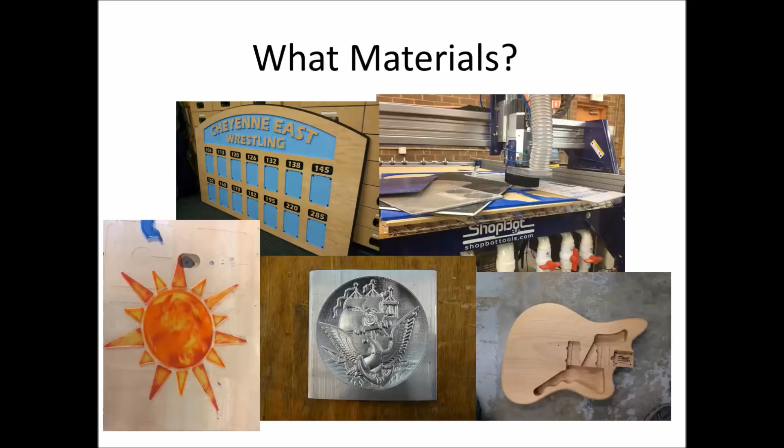For this training, I'm going to reference the router bit starter kit that we sell. You can see it on our website, on our online store, or a lot of you, when you've purchased a machine, have bought this kit. It's 8 different bits that come with the purchase of your machine, and these are just a good selection of bits to get you started. And these bits can be used on a broad range of materials. It's how you program the feeds and speeds for them to cut.

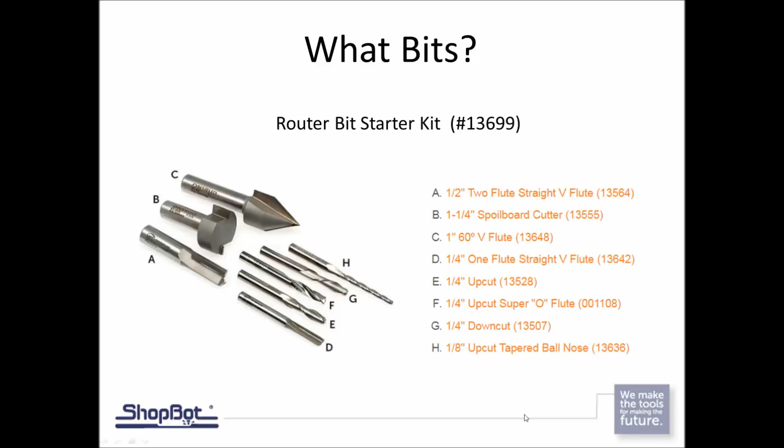So with that also being said, there are hundreds of different bit manufacturers out there, and there's hundreds of different styles and types of bits. But to keep things simple for today's training, I would like to just reference the bits that we stock and that we sell, and these are also the ones that you'll see in your tool database. So that goes into here where the tool database is, which has these 8 different bits that are already programmed into the VCarve software when you purchase your machine.

Plunge rate has to do with plunging the bit down into your material. So that's how fast that's plunging the z-axis down. So spindle speed, feed rate, plunge rate, those are 3 things that we'll look at when we set up our bit.

I will say the starter bit set here has feeds and speeds that are a good starting point. But what we'll look at next is customizing these for your cuts, because again, these bits can all be used for the different materials, but the feed and speed that you apply them to will be a little bit different.

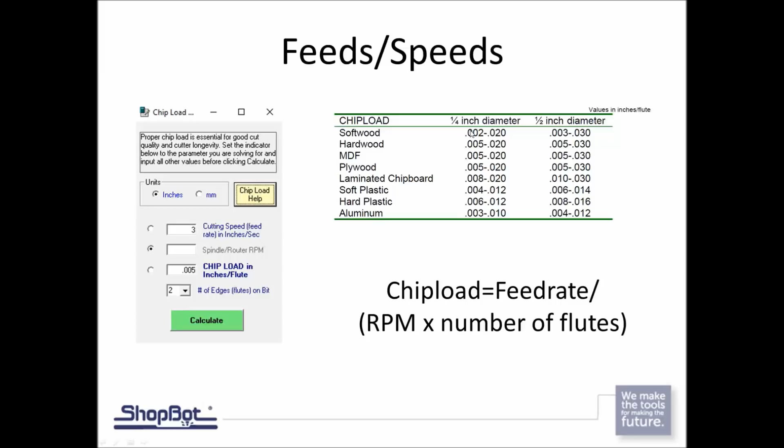And you can get a more detailed chip load calculator if you go to the actual bit manufacturer's website. In this case, Onsrud or Amana are the ones that we're stocking, and you can see that on their websites. But again, the previous slide that showed the tool database, all of those feed rates and speeds are within the ranges here that match this slide.

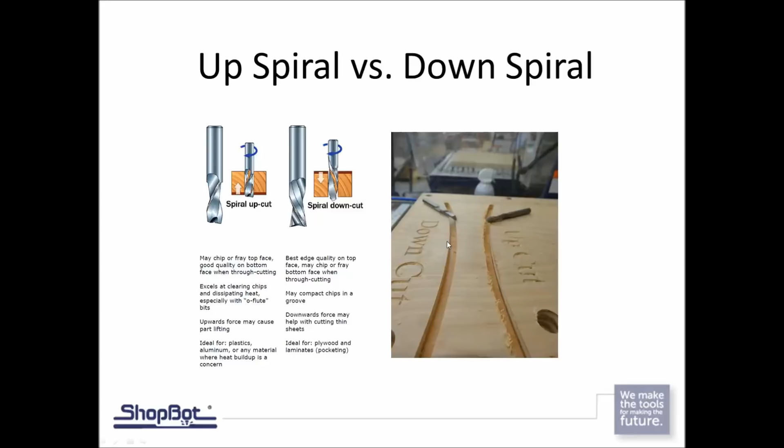So it is exactly what it's called. An up cut lifts the chips up, which could cause fraying, could cause part lifting if it's a thin material. A down cut is nice because it pushes down so it doesn't rip the veneer. But with a down cut, you do want to be careful that you're not drilling, because you'd actually be pushing the material down inside of a hole.

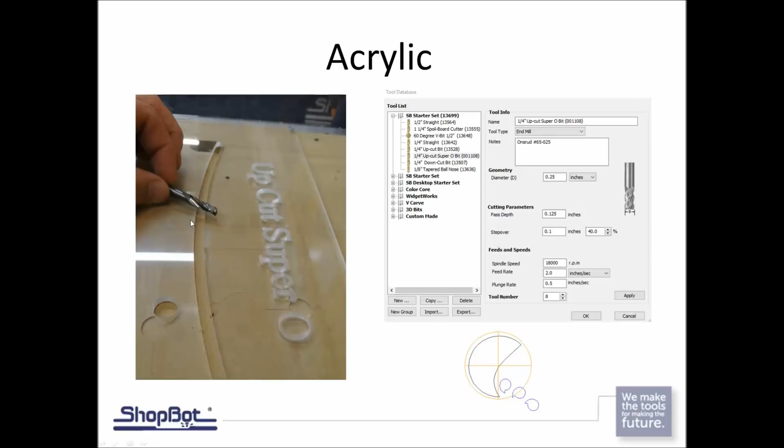What's nice about using this O flute, it is an up spiral, so it helps get the chips up out of the cut, which gets the chips away from the bit, gets them out of the material, helps keep the bit cool, helps keep the chips from building up down inside the kerf of the cut. And you can see on the bottom diagram there how it actually cuts away and curls the chips and actually flings them up out of there. So it's a neat cutter for a lot of different types of synthetic materials. So that's the one that we're going to recommend for doing the pocket profile cuts in acrylic materials.

The only thing I want to tell you, if you're going to look into material distributors, a lot of the times these guys are going to want you to buy a full 4x8 sheet. Sometimes they're going to want you to have a minimum order. So just check. Yellow Pages, Google, plastic suppliers in the area to find those.

But I will also point out another place that I use quite a bit, called inventables.com. These guys even have their own CNC machines that they sell. They have a little bit of everything. But what I like about these guys is I can go onto their website. If I have a specific job where I only need a certain size material, instead of having to buy a full 4x8, I can get, say, a 12-inch by 12-inch piece of clear acrylic, and I can order that right from their website. You pay a little bit more to have it cut down in size for you, but it's real convenient and nice. So these are a couple different material suppliers.

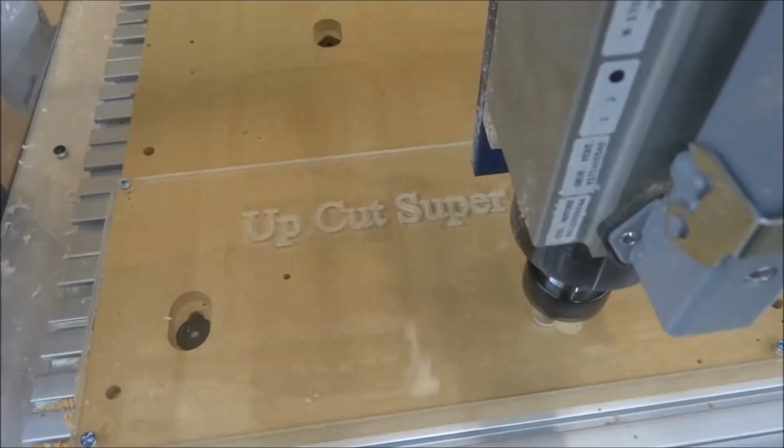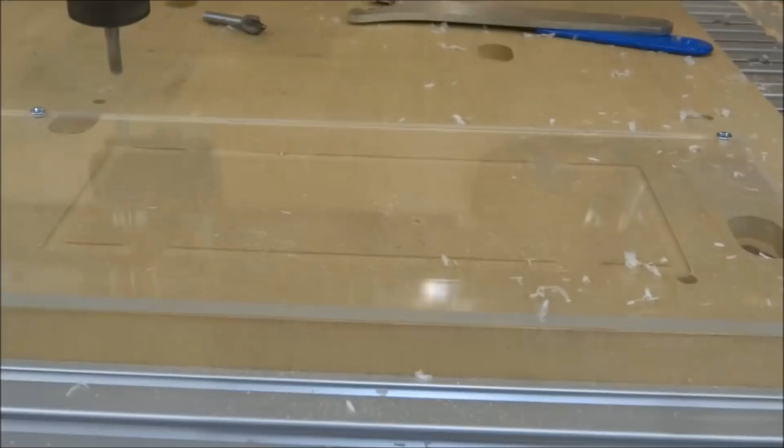Well, here we can see the bit cutting into a clear piece of acrylic. And what's nice about acrylic, there is no grain pattern that you have to worry about. And you can see that I just ramped that in so that bit didn't jam down inside of the material. Here again you can see the ramp, and you can see tabs being used, and this is a really nice bit for cutting these acrylic pieces.

Tip with that is sometimes people will run it, and there might be a little bit of fuzzies that get left down inside there. Some people will go ahead and run that file again, and that will clean it out. I personally like to use an air compressor with a real fine tip and blow down into the V carving, and that helps get rid of whatever residue is left.

A couple other tips: make sure you're adding a ramp, so you're not just jamming that bit down inside there. Acrylic can be real hard, and if you jam that bit down in there, it's not going to get a real good cut. You do not need to worry about the grain direction, as the big sheets of acrylic do not have that in them. And always, again, different brands.

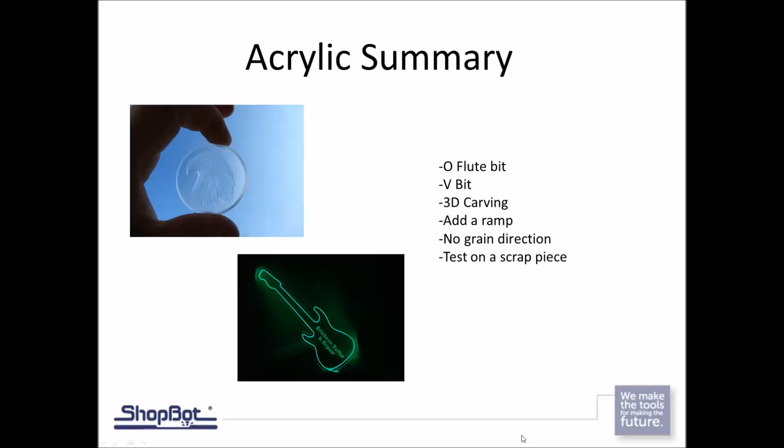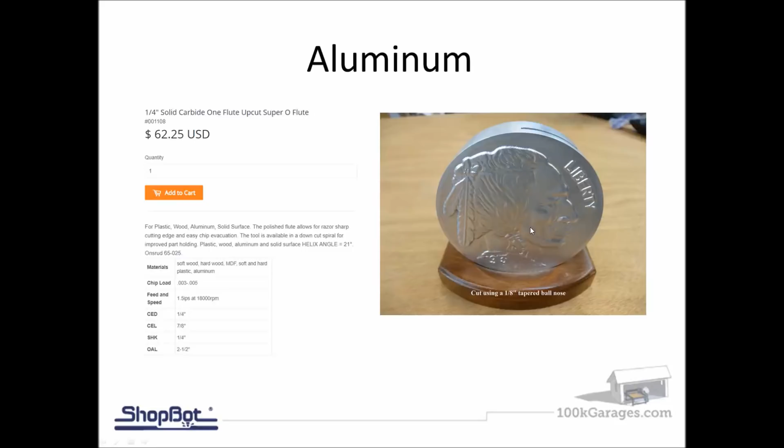It's the feed and the speed that you set them up with when you go to cut out of that tool database. So again, 1/4 inch end mill for doing your profile pocket cutting. And here you can see this Indian nickel was cut with an 1/8 inch tapered ball nose.

Aluminum sources: again, you can buy things from Inventables, which was talked about earlier, if you just want little sections instead of full-size materials. Locally here we have something called Dillon Supply. I can drive over there with my truck, I can get a 4-foot by 8-foot sheet of aluminum, and they'll set it right in the back of my truck with the big crane.

It's really nice. One thing I really like to do is there's a place here in town, and they're all over the place. I remember these back in Michigan when I lived there; Padnos was the company there. Down here, there's one just called J&D Recyclers. It's just a mom and pop place here in town where they take scrap metal, but they'll also let you go to their yard and pick out metal.

So I could go there and find some scrap pieces of aluminum of whatever thickness or size that I want, and they go up there and they'll weigh it and they'll sell it back to you. So instead of having to buy something brand new or to a certain size, I can actually go and buy some reclaimed aluminum sheet stock to cut.

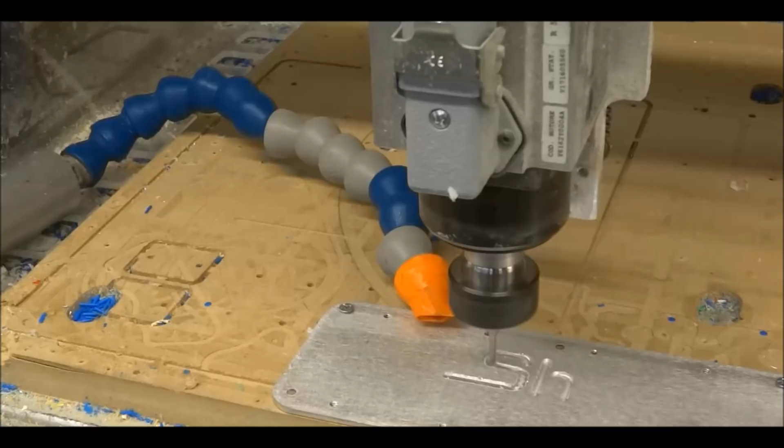Here we can see an 1/8 inch end mill cutting out the ShopBot logo, and the tube that you see next to the material is something called a cold gun. That's hooked up to an air compressor, and what it's doing is it's constantly blowing cold air on the end of the bit and on the material. And what that's doing is keeping the material from heating up and sticking to the bit.

And that's one of the problems, especially cutting plastic and aluminum, is the material will start getting warm, the bit will start getting warm, and the material will just start sticking right to the end of the bit. So that's where that cold gun is on. I took it off for this picture.

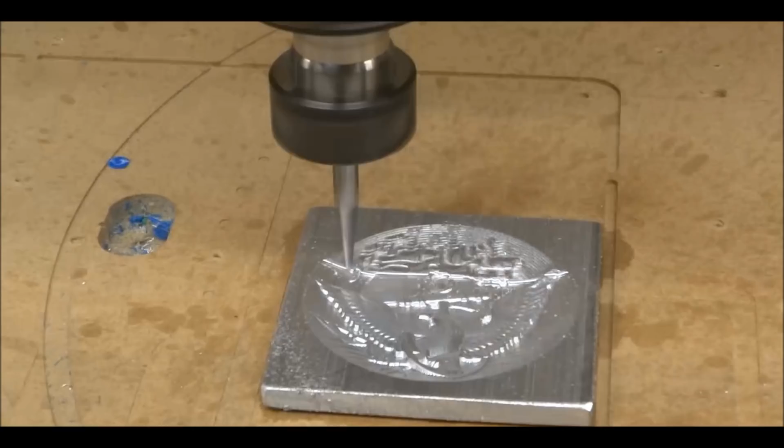Again, you can see a little 1/8 inch end mill going down and doing a pocket cut. Again, the thing with the aluminum here is shallow passes. So it's able to move and cut nicely and have a really good feed rate and speed, but we're doing real shallow passes. And then here you can see it doing 3D carving as well. So again, all the different bits in the bit kit are able to do these types of cuts. It's the feed and the speed. You have to set it for aluminum.

All right, the key with aluminum is keeping that material, keeping that bit cool. The first thing you can do is a shallow pass. So you're using a small bit, 1/8 inch, say, diameter, 10 thousandths would be a good pass depth, which is 0.01. Sometimes with the larger 1/4 inch bits, we'll go up to 30 thousandths, 0.03 for a pass depth. But it's a lot shallower of a pass depth than you're used to if you're cutting other plastics and wood. So shallow passes. Keep the material and the bit cool.

Also, clearing the chips away is key. That's one thing that's really nice about the cold gun too, is it's constantly blowing, so it's pushing away any of the cut chips. So it helps keep those from getting built up on the bit or in the material. Chip load, again, refer back to one of the earlier slides there. Make sure that your chip load, your feeds and speeds are inside of the range.

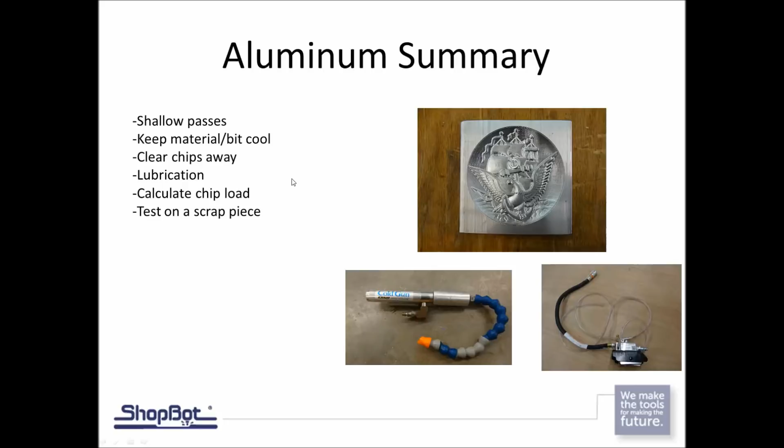Alright, let's look into some wood cutting now. And again, I need to point out there are thousands of different species of wood out there. Hardwood, softwoods. Each wood has its own specific characteristic, has just different grain patterns, has different densities. So knowing about your wood that you're going to work with is key. The texture, the grain, the density, like I said. So know your type of wood.

And if you don't know anything about the wood that you have, get online and research it. Learn about it. Look at some of the other people. There's lots of forums that you can get a hold of. A ShopBot forum is a key place I would start, and ask other ShopBot operators what they recommend for feeds and speeds. But let's look at setting this up with what we already do know. Again, we'll go back to the up spiral and the down spiral. The video here that we're going to look at is testing the different up cut and down cut bits.

I just want to point out, if you're going to be doing any drilling, you want to avoid using a down cut. If you're going to say use a 1/4 inch bit to drill 1/4 inch holes, with a down spiral bit, you're pushing the chips, the sawdust, down inside of that, and that may compact chips in a hole or a groove, and that's not giving any relief for the bit, because there's no place to extract the material.

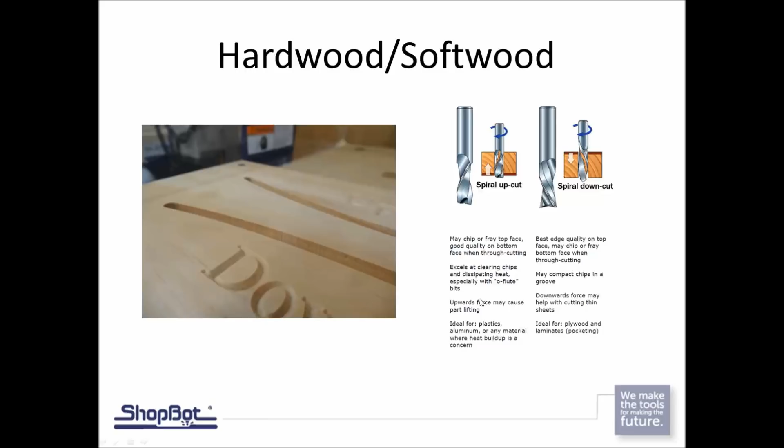So you're going to build up friction, and you're going to build up heat, which could dull your bit, if not break it. And if you have something like a vacuum hold down in place, you're also going to build up circulating air, which is going to fuel the heat process. So up spiral and down spiral.

So hardwoods, softwoods. Again, we can go to anywhere, local lumberyard, Lowe's, Home Depot, and get different types of species. A lot of these have your pine. These are going to have red oak. Some of them may have white oak, but typically red oak. They're going to have some birch. They're going to have some poplar. They're going to have just a few basic types of hardwoods and softwoods.

Find a local supplier like we have here in the area called Horizon Forest Products, where they have maybe 50 different species of hardwoods and softwoods. And then there's other wood specialty stores, say for instance like a Woodcraft, that is going to have more of your exotics and stuff. And just to point out too that all the different bits in this starter kit are able to be used on wood.

But when I say wood, I want to say that very loose, very generic, that there's lots of different densities, textures in these different species of wood. So when we set up our bit, the same bit can be used for cutting a nice piece of, say, pine versus a piece of white oak, which has different densities, different characteristics. The same bit can be used. It's just you may have a little bit of a different feed or speed to set that up.

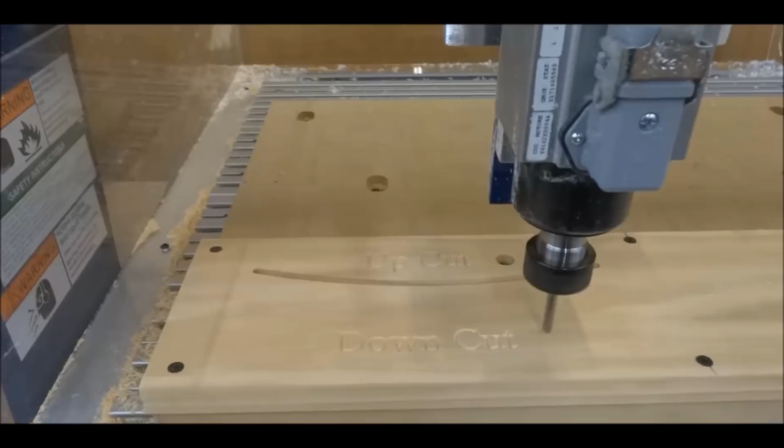So when cutting wood, there is a good and a bad time to use an upcut or a downcut. What's nice for upcut is drilling the hole that you just saw there, but you do need to be careful with the upcut when we just did that long cut, which could fray. Now here we're using a downcut, and this is okay using a downcut to drill because it's a hole that's larger than the bit's diameter. And then doing the same cut, because we want to examine the difference here of the up and down cut. And then here's just showing you the downcut going across and with the grain.

Multiple passes, but I prefer the downcut when possible, so I'm not going to pull the chip out or rip the outer face that's up. Here, just showing you the tabs to pull them off. Nice tab. Prefer to put the tabs going back and forth with the grain. Makes them real easy to nip. And you can see using the downcut, it does give a nice edge, and it doesn't rip the outer face cut.

So you find yourself getting into cutting hardwoods and softwoods. There's lots of different species of wood. So study up on the wood, read up on it, know about the grain. Is it an open grain? Is it a closed grain? The density, how hard of wood it is. That's going to dictate your feeds and your speeds.

Once you work on using your chip load calculator to get your feeds and speeds, think about the bit that you're going to use. The upcut and the downcut both had an excellent finish here on this piece of pine that I cut in the example. You can't even see the up or the down difference as far as it ripping the little fibers in the wood. It was real nice.

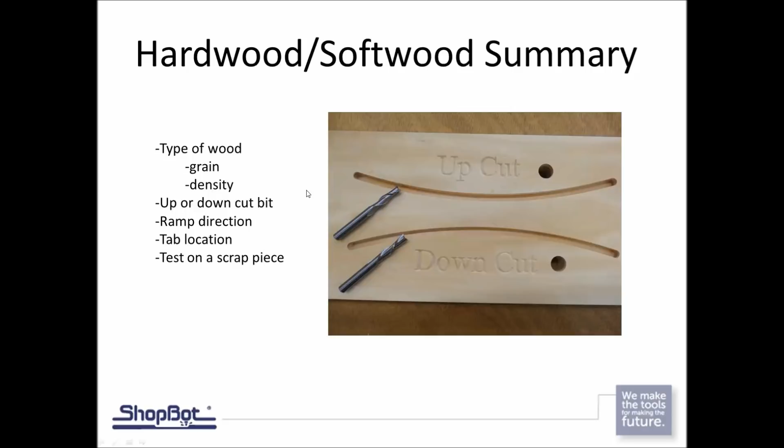And again, we've been showing this on every example of different materials, but test it on a scrap piece. Before you get into cutting into the large piece, use a corner of it, scrap piece, extra piece, whatever it may be, but just make sure you test it out first and you're getting the edge quality and the results that you want before you start cutting into your project.

Well, let's look at plywood next, and we're really just building on what we just saw with hardwoods and softwoods. Grain direction and that stuff matters just as much in plywood. The outer veneer has a grain to it, and one is you don't want to use an up spiral, which could rip that veneer, especially cutting across grain.

So one thing I just want to point out too, in plywood there is another bit that I really like to use. It's called a compression bit. I wouldn't recommend that for any of you guys that are watching this today who are just getting started. Stick with your straights, your ups and your downs.

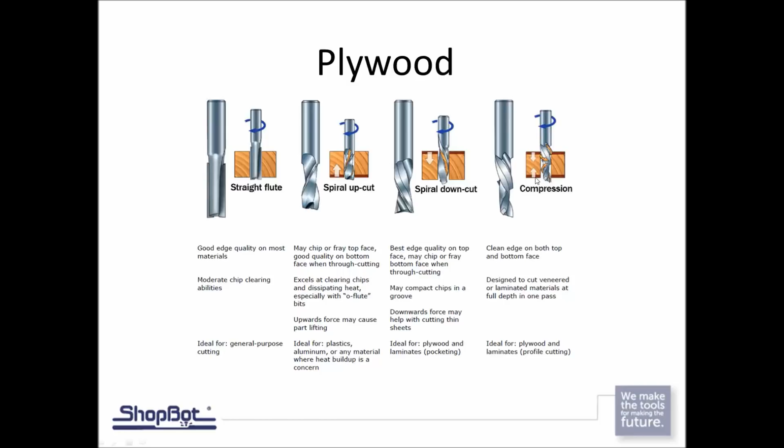But once you've really become familiar with your CNC machine, a compression bit is ideal for cutting plywood because it has an up spiral on the bottom and a down spiral on the top. Both cutters are built into one bit, and it keeps the outer veneers on both the top and the bottom from ripping. So there's an upcut on plywood, and you can see it's already starting to chip that outer veneer. And watch as we do a cross cut to the grain, it just pulls that veneer apart and rips it.

Put a downcut bit in and see the difference here in the hole. Now again, with downcuts, if you're going to drill with it, make sure it's a bigger hole than the bit diameter. But a downcut does not fray the veneer like the upcut.

Let's step back real quick and look at the difference between an upcut and a downcut bit. The ones that we have here in our bit kit are both 2 flutes. Now we're not talking about the Super O that we used in our aluminum and our plastic earlier. These are different bits that you'll see in the bit kit and in the tool database. These are 2 flutes. One's an up spiral, one's a down spiral.

Physically, by looking at the two of them side by side, one has a cutter with a helix to the left and one has one to the right. So the bits are almost identical, they're just a mirrored image of each other. So it's really hard, is what I'm trying to point out, when you're grabbing one out of your tool bit kit or out of your little bit holder to go, oh, did I grab the up or the down?

And you don't want to find that out after you made the cut and go, oh, that was the wrong one. Look what it did to my veneer. I just cut into a $70 sheet of plywood and ripped it up. So the part number is on the side of them. You have to come up with a system that works for you for keeping the up spiral separate from the down spiral, so that you put the right one in.

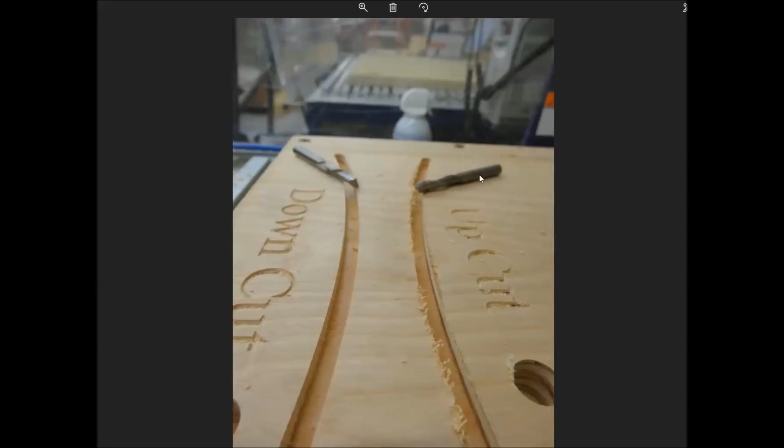So for me, I have a tool bit holder that I keep next to my ShopBot, and it says upcut bit V-carved down into it, and the other one says downcut. I guess that would come down to the operator, to make sure that I put it back in the right location. Otherwise, again, on the shank of it, you'll see the part number, and you can match that with your tool database to see if it's the part number that goes with the upcut or the downcut.

To summarize cutting plywood, bit selection is key. Up spiral, down spiral, we just looked at the difference there. Material selection is big too. The quality of the plywood, the number of plies, how flat a material, the grade, the outer veneers, making sure that you have a good quality piece of plywood.

Ramp direction is the same as when we were talking about the hardwoods and softwoods. It's nice to have the ramp go with the outer veneer. If you're cutting with the outer veneer, you'll have less tendency to rip that outer veneer by cross-cutting with the ramp. Tab location, same with the previous example. If you put it to match going back and forth with the grain or with that outer veneer, it's a lot easier to nip out of there. Sometimes it's not always the case where you can put the tabs, but when you can, that's great.

And again, always test on a scrap piece. A lot of these plywoods are $40, $50, $100 a sheet, and it's better to test your feeds and your speeds and your bit and how it looks on a little test piece or on a scrap corner of the plywood before you cut into your main piece.

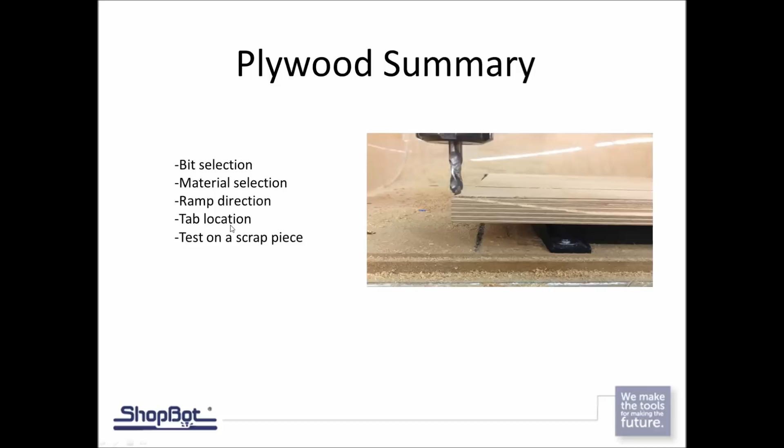Now, PVC has become very popular. It's actually become very affordable lately, and you can get it in different nominal sizes from your Lowe's, Home Depot. You can also get it in sheets as well. I've seen it at Home Depot here in North Carolina, where you can get it in 1/2 inch by 4x8 sheets. We also order it 3/4 inch from some of our plastic suppliers. But just so you guys know, if you're looking to get into PVC, you can just go to your local lumber supplier and get it.

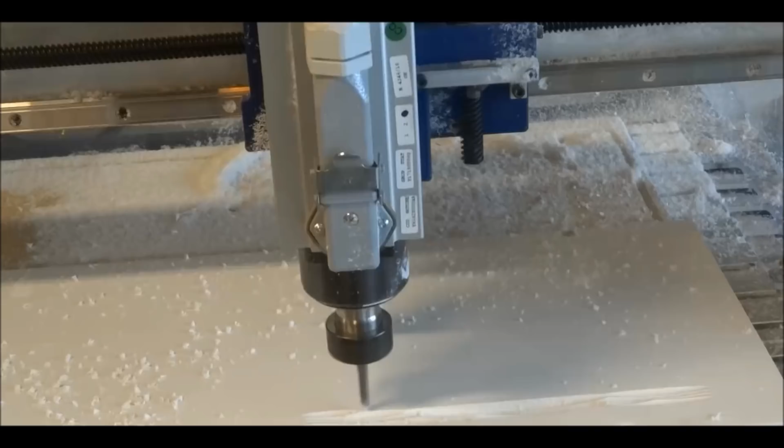Okay, here we can see the ShopBot machining PVC. The goal of PVC, again, we're back to that super O flute, but what we're looking to do here is not overheat the bit or the material, so that if we do that, it's going to re-weld the chips back into the kerf of the cut. So we stick with the O flutes when we're doing profile cuts with this, because it helps get the chips up out of there. It's a nice material, it's great for outside, it has sealed edges on it already.

Do remember that it has a cellular core, so when you cut into it, the core of this is a lot more open than the outside faces on it. And you've seen this a few times now already in this tutorial, but test it on a scrap piece. I can't say that enough.